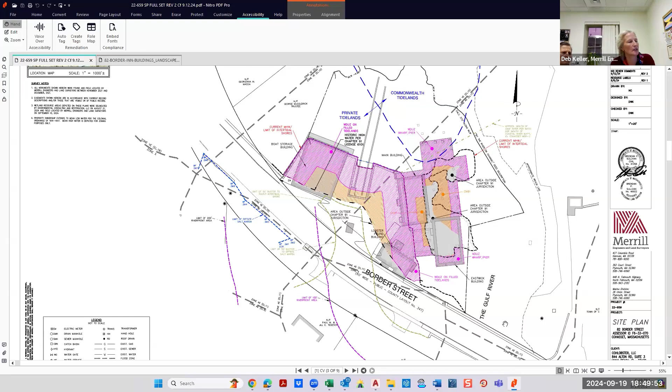Moving along, as mentioned, we have a detailed construction plan included, which includes an erosion control and demo plan. This is the boathouse that is to be razed and removed. This is the gatehouse, which we're doing some minor restoration to. And these two structures here on piles, along with the associated deck surrounding them, will be elevated approximately 3 feet, going to a first floor elevation of elevation 12, as well as the deck.

We can go into detail on construction staging if needed, but we're showing here the minimum work needed, which is the stabilized construction entrance and erosion control around the upland area and pavement area. The write-up from the contractor goes into further detail on additional erosion control needed while raising the buildings over the water.

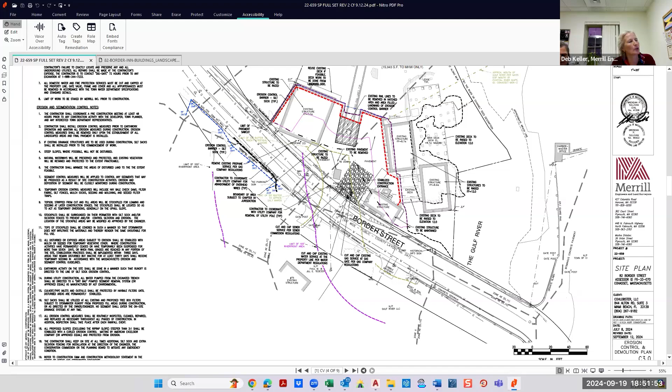Okay, I'm going to move and zoom in a bit more here. Site plan: I think the biggest change is the boathouse, which currently goes all the way up to the abutment and follows this line. We're razing that structure and proposing a smaller structure farther away from the water resource or intertidal mean high water resources.

We're staying within the existing impervious surface areas of the site. The gatehouse here will have minor repairs on the outside, but no major structural changes. The main inn and the Eastwick Inn and the decks will all be raised.

Access to the site will still continue to be off Border Street. We have a horseshoe driveway, surface parking here, and additional surface parking which will be at-grade garage with the unit above in the new building. With that being said, the goal here was to make sure that we enhance the site.

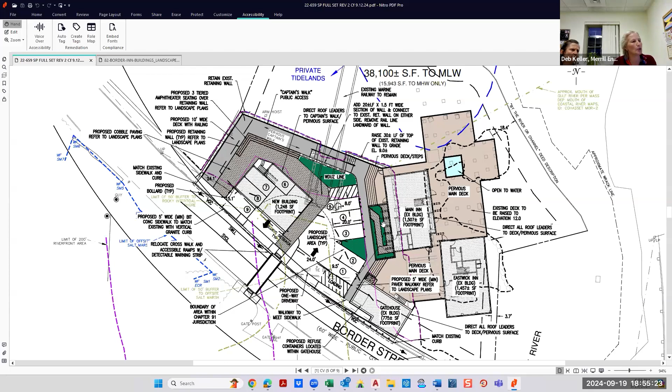To show you a bit of what we're doing, as mentioned, we're proposing a retaining wall here so that we can fill this portion of the marine rail and raise these two, tying in surface grades into the two buildings and deck that are being elevated.

With that, we still have to meet Border Street, so we're only raising the site itself up to approximately 9.3, as 9.4 is the high point on the site, where I believe it's on average about elevation 7. So it's about 2.5 feet of fill. This would be the deepest area right here where the marine rail is, and obviously we'd be tapering back to Border Street and then tying into the existing structures.

The new structure will be at grade at 9.3. The gatehouse remains the same with a slab of 9.2, as in existing conditions.

And then, quickly just showing you utilities: all the buildings will have new utilities subsurface, and the goal of the project would be to put the electrical underground at the frontage as well, so that all services would be underground.

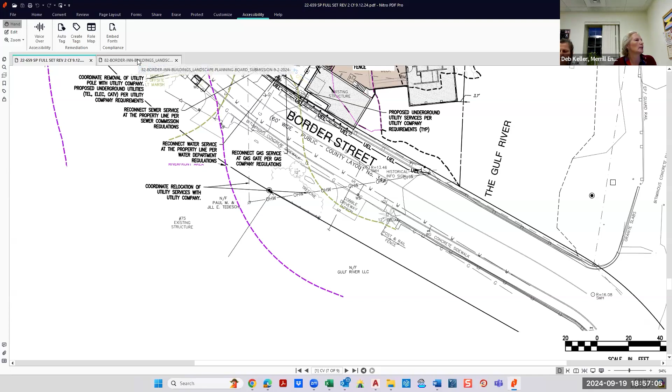And I can hop briefly to the landscaping plans that were submitted with our resubmission. I'll zoom in just a little bit closer, maybe not that close.

So what's nice about the deck, I didn't mention this too, is that they're looking to have sort of an open view area on it so that we can enjoy the water below and watch that flow, as I'm sure it can be quite amazing.

And here you can see the Captain's Walk again. This darker gray here is some seating area put in to enhance the Captain's Walk along the harbor side, and then back into the Captain's 5-foot walk as you continue back down to Border Street again.

As you see here, you can see the planters that the landscape architect was intending for the deck, and those would be movable structures, so they can reconfigure those areas as needed. Accessible ramp up to the main entrance, with landscaping surrounding the ramp and 2 larger landscape areas with pervious cobble pavers around the new building.

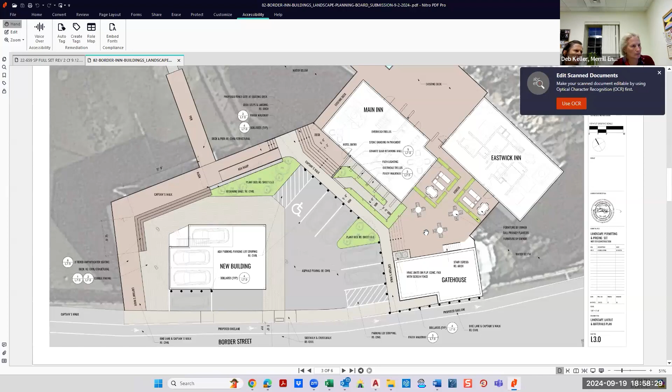Let me scroll so you can see this. Kara has grasses and ground cover, a swamp white oak, some Rosa virginiana, and beach plum in the main large area for landscaping. Similar again in this larger area, and consistent with the grasses and a Rosa virginiana in the walkway ramp landscaping areas.

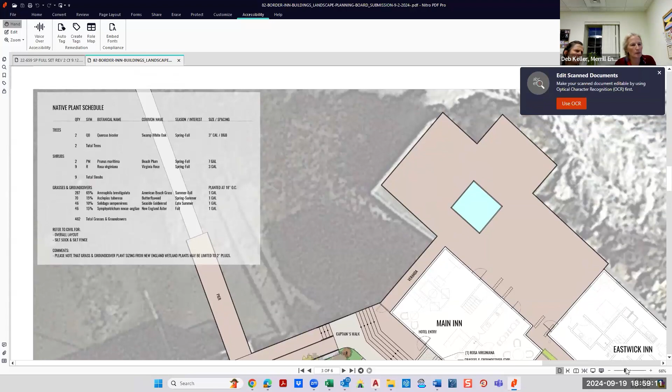I believe if I can zoom up here, you can see what is being included. Let me make that a little bigger. So again, swamp white oak, beach plum, Virginia rose, and several grasses and ground covers.

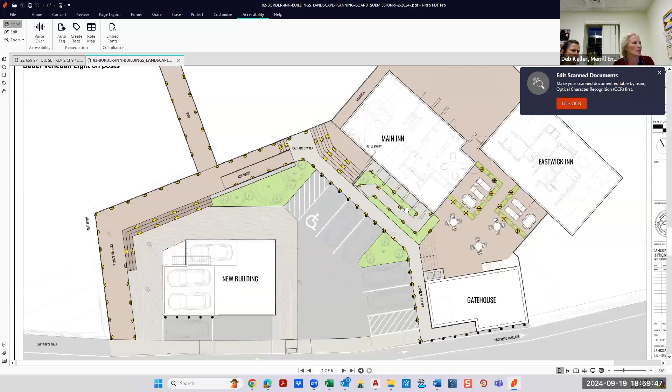And I believe that's probably the one you want to see the most. She has identified lighting, so everything is down lighting, pedestrian lighting, no tall street lights, just to try to provide lighting for accessibility, pedestrian accessibility through the site. And those were the details. I think I've covered pretty much everything, and I'm happy to answer any questions.

Can you think of anything else? No? Thank you. Okay, put us to pretty picture. This one.

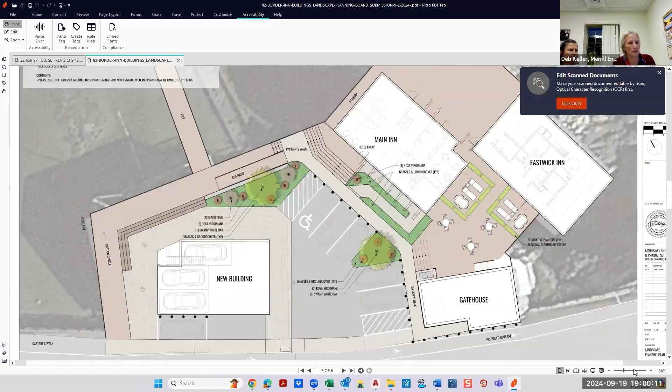So before we move on to Commissioner Charlotte, I know that you had prepared some comments, and there was some back and forth and some responses from the applicant. Before I move on to petitioners or commissioners' thoughts and questions, is there anything outstanding that you want to bring to our attention first? Yeah, so just a couple of things from my round of comments.

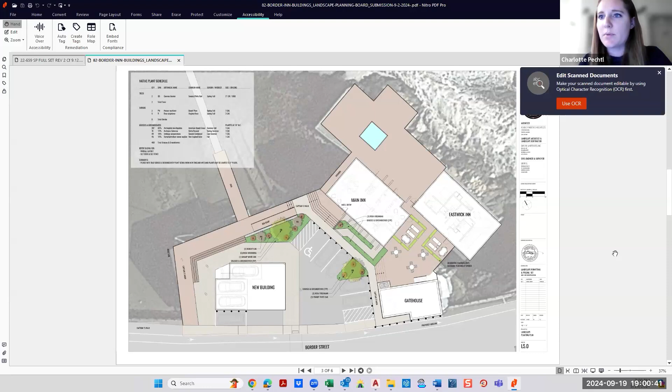So as of yesterday, I believe, we did receive comments from the Division of Marine Fisheries. Just a quick summary: they're not recommending a time of year restriction because the work is utilizing the existing piles that are below the deck. That was a clarification I had as well, addressed in the comments, that for the existing piers and pilings, they're not replacing any of those, so there will not be impacts to land underwater for that. That's why DMF did not recommend a time of year restriction.

They did recommend that construction activity near the intertidal zone be limited to work in low tide and dry conditions for the removal of that railway. And then they had some other recommendations on staging and obviously doing the work all from the upland and not from the water, given the sensitivity with the Gulf River and fish passage and habitat.

The wetlands that were flagged, the salt marsh across the street, we're just waiting on the wetland delineation report from ECR on that. The harbor master did mention to me that she did want to review this. Depending on her comments, I'm not sure if they would be more suitable either for conservation or for one of the other board reviews. So if they are related to conservation, I will obtain those.

And then there were some updates to the plans regarding erosion and sedimentation control. Some of that might be contingent upon the pending peer review revisions in regards to stormwater management and compliance with the stormwater standards. So we would probably want to see those site plan edits on the plans. I'm sure there'll be some discussion and conditions about that once we have more of a final version.

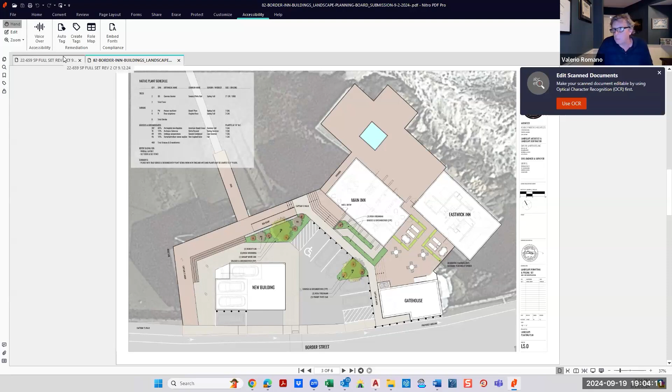Great, thank you, Charlotte. And so for the commissioners, this is clearly an early meeting where we're obviously going to hear more about this project and get some additional information. So with that in mind, Commissioner Bell, what questions or comments do we have for the applicant?

I guess the first thing I'm wondering about is the elevations here. You're in the AE zone where the flood elevation is 11 feet, I believe. Yes. And the highest elevation in the horseshoe or courtyard that you're doing here for parking is at 9.44. Why wouldn't you anticipate that the AE zone would be elevated maybe in the near future? And would that cause problems for you?

I'm not sure that that's within our jurisdiction. I'm sure Mr. Brodsky will correct me if it's not. But just as a matter of curiosity, I would think it would make sense to try to at least get to that AE elevation early rather than have to retrofit this thing at some later date.

So I can answer hopefully a little bit, and if I'm wrong, Adam can correct me. The structures will all be elevated, specifically the two larger buildings, the Eastwick Inn and the main inn, as well as the deck, will be elevated to elevation 12 above the AE zone. The new building has a slab of 9.3, but that's parking below, and we'll have flood vents so that it is flood compliant. The residential portion of this is on the second floor, so it'll be well above the floodplain elevation here.

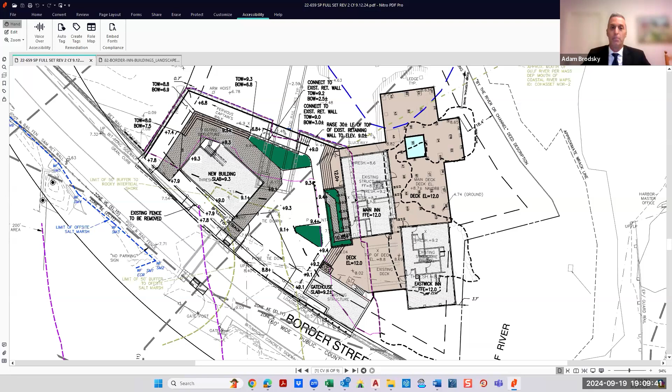Well, I know the question I'd like to ask would be outside of our jurisdiction, so I will not ask it. We'll leave that to zoning and planning. So beyond that, I don't really have any other questions or comments. Thank you, Commissioner Bell. Commissioner Berrigan?

I was wondering if maybe the commission would be interested in getting a peer review to check compliance with WPA, because there are several resource areas on this particular site. Would that be something we might consider, to make sure everything's okay?

I'm asking my colleagues — yes, that is my consideration, Commissioner Berrigan. From my perspective, yes. I always encourage that, if it's the will of the rest of the commission, particularly when we're talking about compliance with resource areas, and I'm all for it. I don't know what the rest of the commission thinks.

Maybe you want to move on to any other questions or comments you have, and then we can bring that up with the rest of the commission and talk to the applicant too, as to whether now is the appropriate time, because this certainly isn't the only hearing we're going to have with them. We're going to get further stormwater comments back via the planning board's request for peer review, my understanding. Are there other questions or comments? Then we'll get to that one.

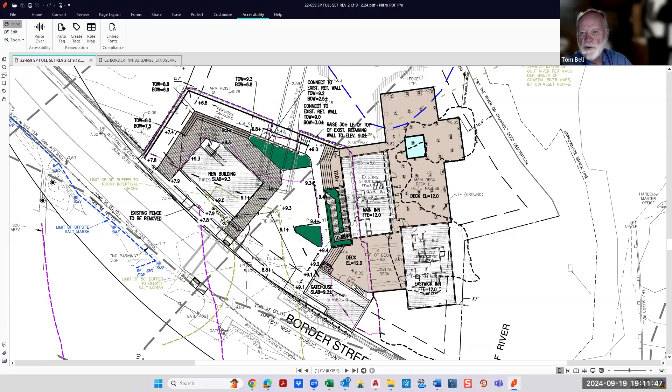I think for the applicant, it would serve all of us better to present a far less complex plan. There's a lot of stuff that we don't care about — it's outside our jurisdiction, doesn't matter to us — but it would be nice to see an expansion of what you've done here, identifying those areas with the most restrictive aspects, so we can talk about each individually. This is a good start, I think. A lot of the material has been removed, and perhaps this might be sufficient.

But I'm just always looking at these plans. The first one looked like a plate of spaghetti to anybody not used to looking at these construction diagrams. I think it does not serve an applicant well to have lots of stuff on their plans that is not in our jurisdiction. So it's just a reminder to applicants — make it simple, make life easier for us.

And Chair Romano, at the appropriate time, I'd like to speak to that issue, the peer review, please. Sure — maybe if it's all right, Mr. Brodsky, we'll just run through the rest of the commissioners, and then maybe you could come back and talk to us a little bit about it.

To Mr. Bell's comment, for me — Tom has got a lot of experience, and if anyone is talking about spaghetti, then it certainly looks like a four-course carbonara meal to me. So to the extent that we wanted a simplified version, maybe just a short summary or cheat sheet for the commissioners, of which specific regulations are implicated given the various resource areas that exist in this project.

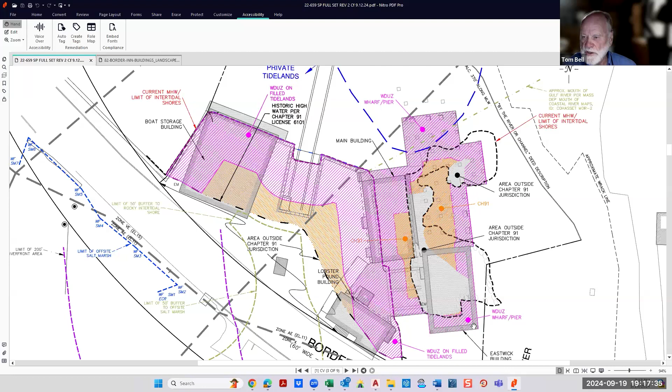And it looks like the load here is going to increase. I could be wrong, but you're adding on your building form. And so if the load is increased, then you need to have a load analysis, and then look at those pilings and make sure that they do meet at least the state requirements.

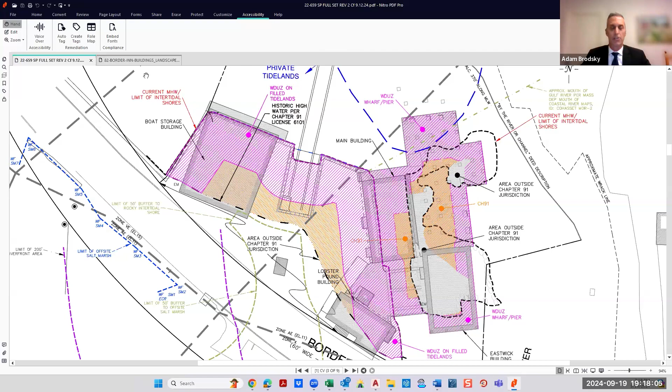Sorry, Ms. Keller, you're muted. This is Adam Brodsky. I don't know whether Deb or Caroline wish to speak to that issue. That's a building code issue. That's not a conservation commission issue.

We will need to, as part of our building permit application, make sure that we provide evidence sufficient to demonstrate that we meet all the requirements of the state building code with respect to load. That will also be reviewed by DEP in connection with the Chapter 91 process, because there are engineering standards for improvements to structures under Chapter 91.

So it's a valid concern. I'm not sure it's a concern of this commission. Or it will be if they need to be replaced. Yes, that's correct. Just a quick add, I just got a note saying that yes, they have been reviewed by a structural engineer. So that review process has happened during the design process that we've had.

I would second that concern, and if for some reason something were to fail, then we would be seriously harming the habitat, and that is under our jurisdiction. And then if they need to be replaced, that's also something that falls within our purview.

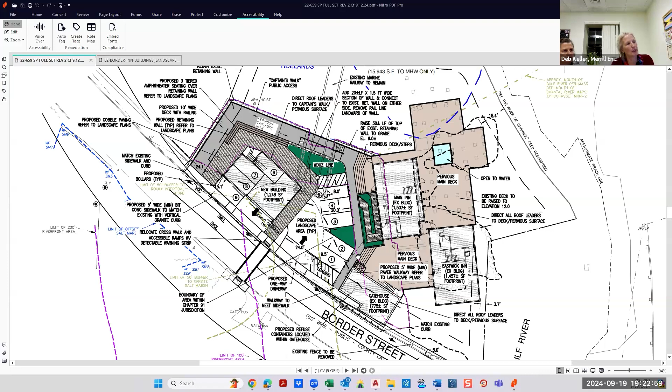Can I interrupt and make an obvious comment—that's land, that's soil beneath on that side. But the east side, the Eastwick side, is this not a land area? Right, this is all pretty much over water. The upland area is this black dashed line, a kind of funky shape, and it primarily encompasses ledge, which is not included as pervious. You have water flowing in a channel underneath the main inn and to the east of the deck and Eastwick building.

So this deck—when we talked about increasing pervious surface or decreasing impervious surface, you were really just talking about the captain's walk over the land. Yes, that's correct. Okay, that helps me understand. Thank you so much.

So Charlotte, was one of the comments from a state agency that there'll be no work from the waterway? Let me pull up the DMF letter. I think they wanted the removal of the marine railway limited to low tide, with all work conducted in the dry, meaning from the land and not in any wet conditions. They also wanted staging of construction material and equipment in the intertidal zone to be avoided, so obviously no storing anything in the resource areas past the limit of work.

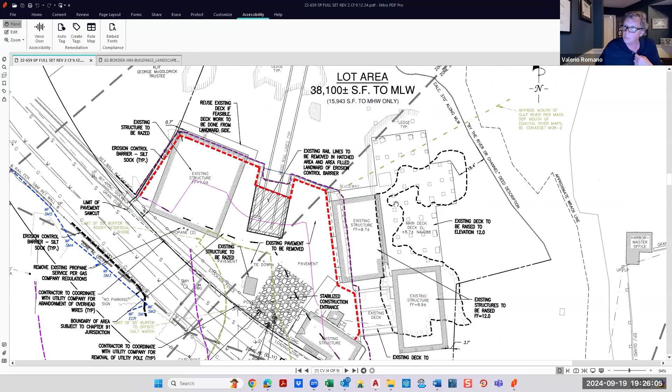Chair Romano, we can provide you with more information. The general contractor is in the audience. The intention here is to do this project from the land side, but there are going to be instances where I believe workmen are going to have to access the outer edges of this. This is what we're proposing to do is very similar to what was done and what is being done around the corner at 46 Border Street.

And this plan was developed, it took some time, and Ms. Pechtl could probably speak to that. It took some time to come up with an acceptable plan that was acceptable to the commission, acceptable to the harbor master, as well as all the other regulators. And we're duplicating that very same approach here because one, it's been approved by everyone, two, it has apparently worked without incident. So that's what we're trying to duplicate at this site.

Great, yeah, and I wasn't questioning that. I just don't want the commission to be in the position of approving or considering construction methodology which conflicts with some other approval that was given, that's the only reason I bring it up. It makes sense to me that there may be a dock that somebody would have to stand on when they're clearing something, but it just seemed conflicting from reading both and then from hearing what Charlotte was saying. So that's the reason I brought it up.

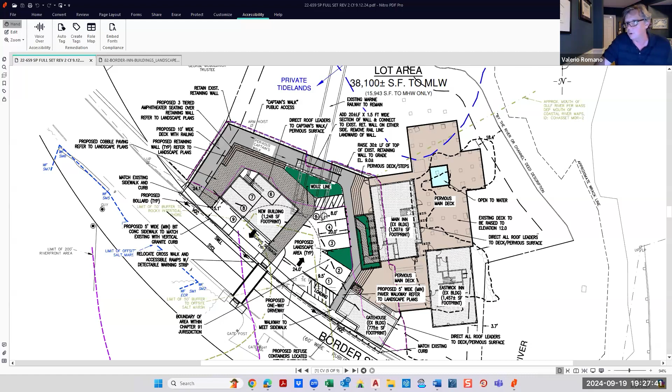And I'm sure if the construction manager, the contractor wants to speak to it, or we can bring it up later on, that future hearing too, if it's necessary. I just thought I would mention it because I saw possible conflict there. But yeah, it seems to have worked well down the street, so I have no reason to think it won't work well here. Those are the extent of my questions now. Does anyone else on the commission have anything else for this phase of the hearing?

Since you brought up this issue, I would disagree that this is completely analogous to what's happening at the old Atlantica site. You have essentially a tidal falls here, a reversing falls here, and so any kind of a silt barrier there would be very hard to maintain. So work that might have to take place on the main deck and perhaps the Eastwick building and maybe even the main building are going to have fairly serious conditions of flow underneath them while it's happening.

So that the analogy can only be extended so far. Some of the things you may be referring to are the nets to catch things from falling in the water, and obviously that seems to have worked out quite well over at the other site, but it remains to be seen how this is going to work out here. Like I say, that analogy can only go so far because it's pretty still water over there. Tide comes in, tide goes out, but it's fairly still water. This is far from being still water when the tide's moving, which is most of the time.

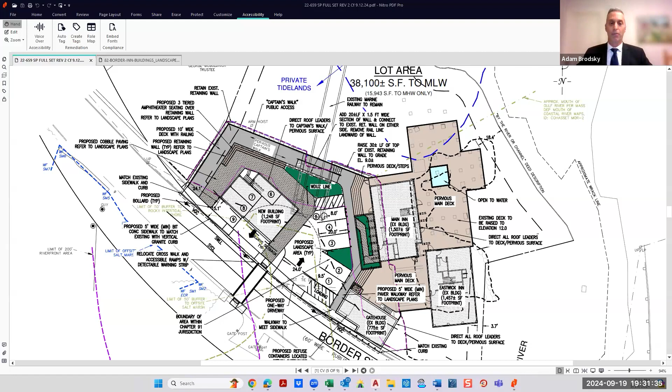I can't speak intelligently about location of booms in the water and the effect of the tidal river on the booms, but again, we're happy to have a conversation. This is not going to be without challenges, and I'm imagining that this is going to have to be adjusted in the field during the course of construction with changing conditions, which I think is what happened at Atlantica. I think we had plan A, and then we realized it wasn't going to work. There were subsequent iterations of that. I don't know what version we ended up with, whether it was B, C, D, or E. It was something about a living thing. I don't have firsthand knowledge of that, but we're prepared to work with the commission and the community to provide assurances, because we don't want any debris in the water.

Thank you, Adam. Just clarifying briefly, it was definitely an evolving process over at Atlantica.

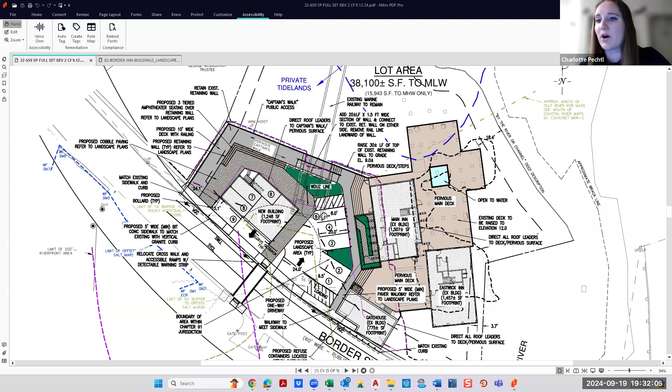The original safety netting design was not able to be physically secured to some of the outward facing structures, so we had to modify the netting design. The floating docks within the silt boom were also a secondary measure to prevent debris—if anything got through, it would stay within the silt containment boom, but it would also be on the floating docks, which could easily be pulled over with rope to remove any debris. So at least we did have to modify that during construction.

That may or may not be something we need to do here, but it's definitely something to discuss further, maybe at another hearing with more information. It might be best to visit the site, which I'm happy to do with the contractor, and look at it initially, but I'm sure it'll probably change throughout construction.

I don't know if there's anything else we need to hear. Given that there's a lot going on here, typically we wait for input from the public until towards the end, which would be a hearing or two from now. But if anybody here wanted to give their input, and anything for us to think about as we come back and refine our plans for next time, now might be an appropriate time.

Charlotte, do you see anybody raising their hand or wishing to speak? Not at the moment. Great, no questions yet.

So before we continue it, assuming there's no objection from the applicant to continue it, Charlotte, is there anything else we should consider?

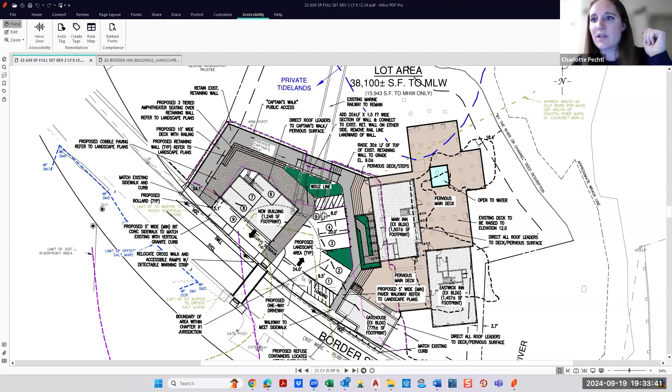Going back to Kathy's question, we'll get updated site plans and responses regarding DMF's comments and the peer review comments from Weston and Sampson regarding stormwater standards compliance. That's definitely some stuff we are waiting on. And then there's the wetlands reports and updating the erosion controls, and potentially putting any silt containment boom location on the plans, or leaving it as something to be decided in the field.

Mr. Brodsky, I know you wanted to speak about further peer review beyond the stormwater requested by planning. Thank you. I'd rather be accused of providing too much information to the commission than not providing enough, but we will provide you with a simplified drawing. It's the commission's prerogative to determine whether you want additional peer review.

I'll offer a different perspective, which is from a wetlands point of view, there's a lot going on, but it's a pretty simple project. We're not doing any work in land underwater. We're not doing any work in the intertidal zone other than to remove portions of the marine railway. It's a floodplain case, and it's a previously developed site intended to improve flood resiliency. So I don't think there's any question regarding the delineation of the wetland resource areas.

We'll have the dredge out in the pond there. We'll be dredging with a 6-inch hose up to our separation area. That fluid initially goes through scalping shaker machines that we run. This machine allows us to separate any large particles.

You can stop there for a minute. This allows us to separate any large particles from the slurry stream. We don't want this material going through any of our separation machines down the line. This is a good area also if we happen to have any small wildlife or anything of that nature that didn't stay out of the way of the dredge. This is an area where we can see that happen, and we're able to capture anything small that made it through the pump so it can be returned back to its environment without harm.

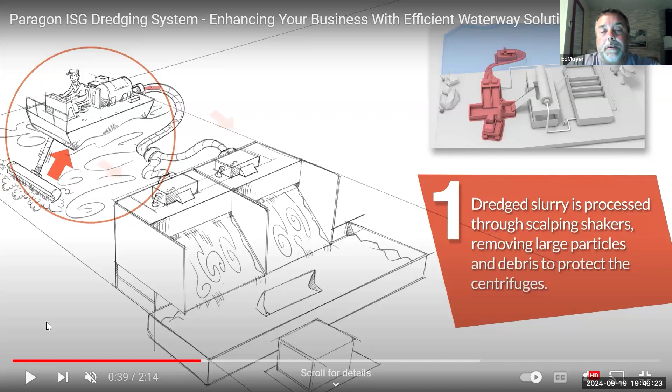So we have guys here all the time monitoring this to make sure we don't have any mishaps like that. And then from this point, if you want to keep going, the fluid runs down into a tank, and then gets pumped over to a clarifier tank on the right hand side.

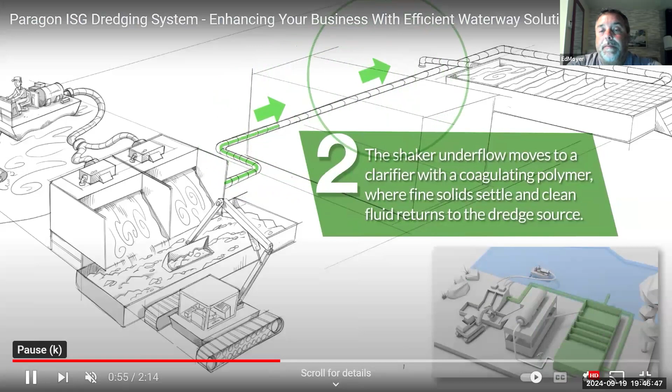In this tank, the debris is mixed with a food grade, eco-friendly polymer. It's a non-anionic polymer that will not harm fish in any way. It grabs the small particles caused in the dredge operation, binds them together, makes them bigger, allows them to settle to the bottom of the tank, and overflow clean fluid off the top.

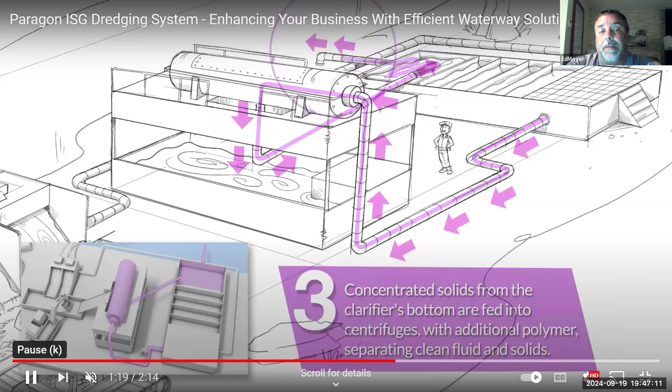We return this fluid back to the pond. The sediment that falls to the bottom of the clarifier tank is actually drawn into a high-speed centrifuge that you see here. It spins at a high rate of speed, and the G-force separates the solids and the fluid.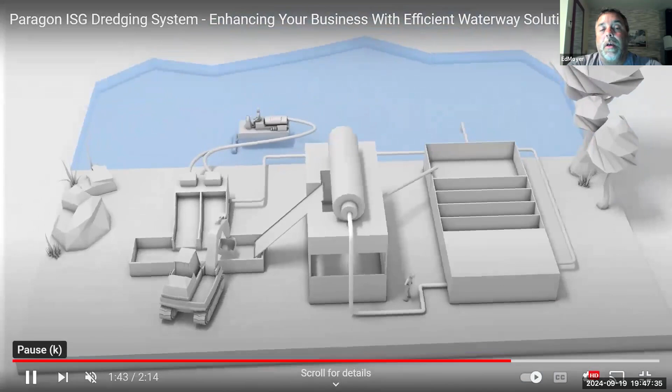Solids go down to a collection slide that'll go into a bin where we will use an excavator for moving that to a repurposed site, stacking it, and the clean fluid comes out the other end of the centrifuge, and that is returned back to the pond.

We return that back at the far end of the pond from any overflow areas. That way it gives plenty of time for any settling that is needed or disturbance that would potentially go downstream. And then again, we have the safety barrier of the turbidity curtains as well.

That would stop any turbidity from going downstream. So that's kind of our process. We use hydraulic dredging. Normally, wildlife and fish aren't disturbed by it. They'll usually stay far away. Like I said, if we do happen to pull anything in, we can catch them at the shale shaker option to return them, which we've done many times.

It's a good safety item to have on site. So yeah, that's kind of the process, and then mechanical separation, and the solids are able to be hauled away immediately or repurposed.

Any questions at all on the process that I maybe didn't cover, or any concerns you may have? I'm just going to put the plan up here too, just to refresh everyone's memory related to the location of the pond with the pumped material to be addressed in an upland area that's already open at the club property.

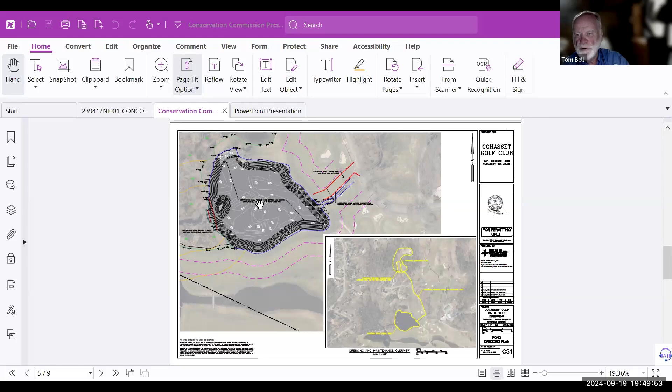So there's still water that's going to be left in your tailings then that you need. A little bit, yes. And can you estimate how much water that would be if you know the volume of material you're going to move or remove? Can you give us a rough estimate of how much water is going to be? Well, you said you're going to carry it off the site. Is that right? You're not going to stockpile it at the disposal site?

And so some of that water then is going to escape from your solids pile, your waste pile. I'm just curious how much do you think it's going to be bleeding out of that? You actually don't get much leachate from the material. I mean, it looks like moist dirt sitting there. I mean, it sounds like a lot, but it's really not. So they'll usually have 20% water, which normal dirt has a lot of moisture in it as well.

So Commissioner Bell, just to continue on that, Mr. Mayer.

Well, last time this was before us, there were a couple options for dredging, but now the team, the golf club team with you, this is sort of the proposal as to what the option is going to be now, right? It's not that the commission's still tasked with choosing one mechanical methodology or method of dredging this, but this is what's being proposed now specifically. Is that fair to say?

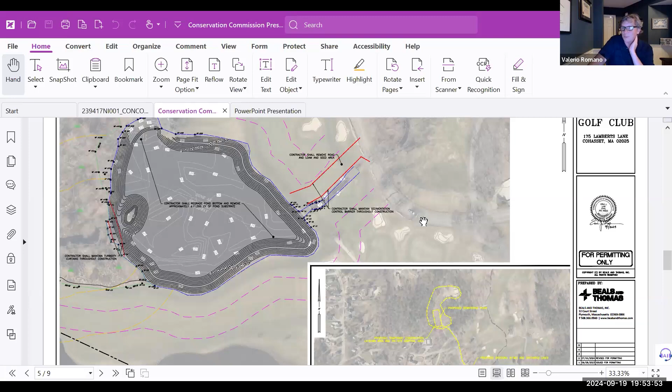We haven't submitted anything since we last spoke in July, just because we wanted to delve in a bit more to this specific proposal so you could understand from Paragon more detail about their process. I really like the simplified view, the cartoon-like description of how it works. It really helped me.

But to Commissioner Bell's point, the July submission talked about 11,000 cubic yards of sediment being removed. Am I to understand that 80% of that is water? No, I'm sorry - to Commissioner Bell's point, it's 80% of the water that's returned to the pond. Less than 20% stays in the soil at the dump area. I was thinking, how could 80% of that water stay on that site? It just didn't make sense.

It flows two ways, so the height of the pond won't change, shouldn't change. What they suck out gets pumped back. So there's 20% which, to Ed's point, is just soil. I think if you did a water test on any soil, it would be about 20%.

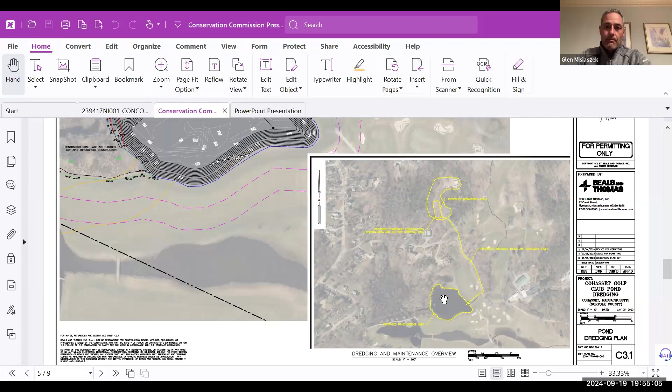So it seems to me one of the merits of this hydraulic system is it's all done through pipelines. You're not going to run trucks back and forth to move the sediment up the hill, and then if you move it off site, back down the hill to cart it off. So that seems like a relatively low impact compared to the machinery necessary to move those solids by truck.

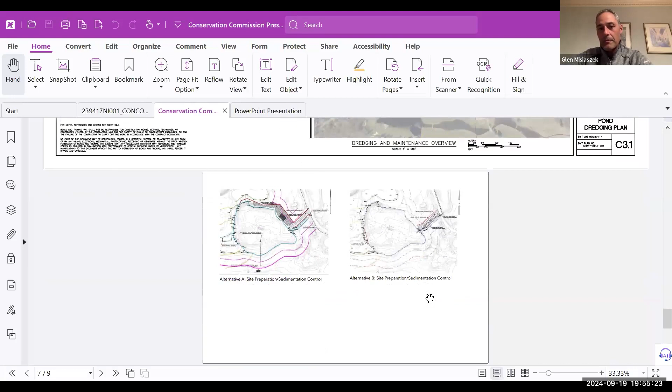Correct. And we're handling what the commission requested last time about how we were going to drain the pond down, and downstream flooding - this has no impact to that. Multiple turbidity curtains will be installed.

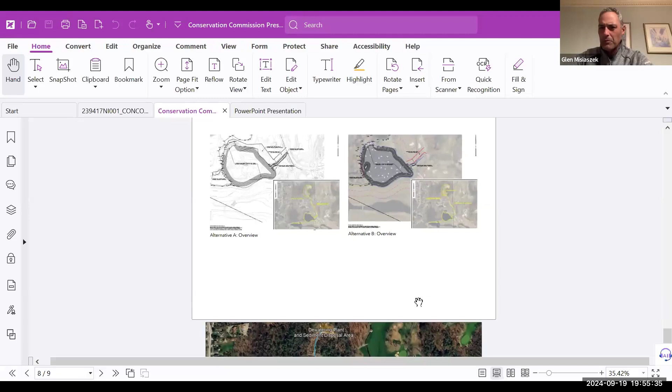And Ed, what did Dan say it gets down to - 2 microns is the filter? Yes, we'll get down to less than 2 micron with a high-speed centrifuge. So pretty small.

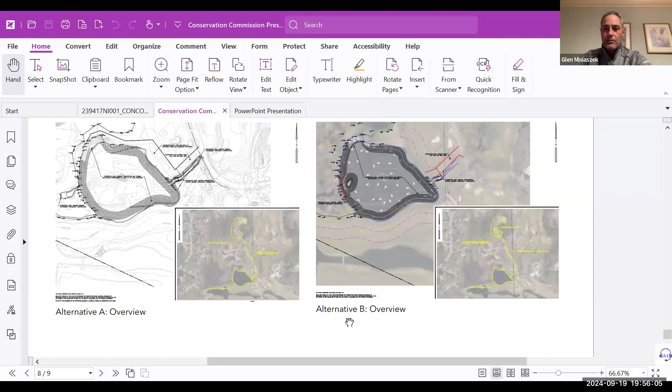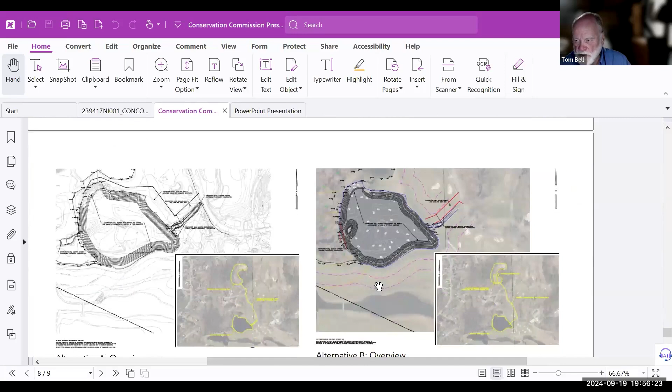But prior to going through the centrifuge, you're going to flocculate that clay with your polymer, is that correct? Yeah, so just before the clarifier tank up on the hill is where the polymer gets injected. And then that polymer stays in the solids - you don't have any polymer carryover back to the pond. So that takes those 2 micron and sub-2 micron clay particles and aggregates them into something the centrifuge can then... Yes, sir, it raises the mass and allows the G-force to separate it. Yes, sir.

Is there no carryover concentration of the polymer going back in the water - it all gets taken out? Yes, as long as it's injected properly, you have very, very little carryover if any at all. As long as it's injected properly, it stays trapped in the soil rather than in the water returning.

Is there a test for that when it gets returned, to check if any of the polymer's in it? You can do an NTU test to make sure, but yeah, very little residual. And if there is any residual, it's food grade polymer - 100% fish friendly. It does not cause any disturbance to the water, wildlife, or habitat. It's very commonly used in hydraulic dredging operations and wastewater treatment.

Does it eventually break down? Assuming it does - it is a polymer, it will break down over time. Do you know the half-life of that polymer? I don't off the top of my head, I'll have to get back to you. Talking about details - days, weeks, months, or years? Months at the most. Definitely not years.

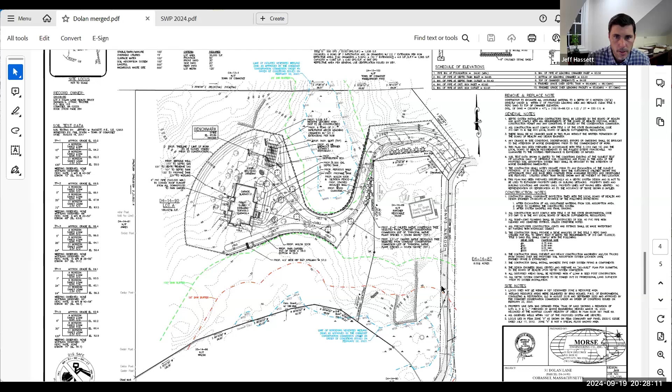So IVW, 25-foot buffer in green. The driveway is going to pitch to the left-hand side where we have a swale shown, detailed on the second sheet, and that feeds into a planted rain garden. And then on the right-hand side, there is a 4-foot tall boulder wall.

So the layout of the house itself doesn't change at all. There will be all the erosion barriers in place, that bold dash line is the mulch sock. We have notes on the plan calling for all of the limits of work to be staked by a professional land surveyor. And we provided stormwater calculations updated to show that there still will be no increase in runoff to the 3 design points that we have. So with that, I will pass it back to you and I can answer questions. Thank you.

Commissioner Bell? Jeff, on the previous. Oh, sorry, go ahead, Chris.

On the previous plan, I don't remember if this was recommended, but I think we asked for alternatives to going through the resource on plan south. There was significantly more trees that would need to be removed for this, and that was one of the reasons why you didn't want to do that. There was a lot of ledge, and additionally you're going right through the buffer, which is only the 25, but in my opinion that's kind of like the 50 if it were a regular bordering vegetated wetlands. So is there a mitigation plan for the buffer zone that you're driving through here?

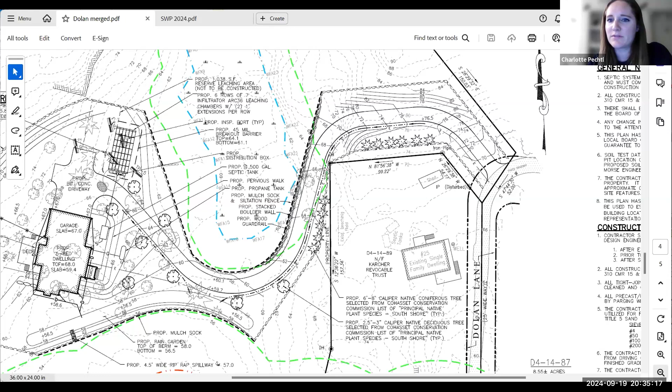Jeff, do you know the date of when Brad flagged this? I know it's been a while, but I don't know what time of year he went out. Usually it says it on the plans. Oh, February 2023. Okay.

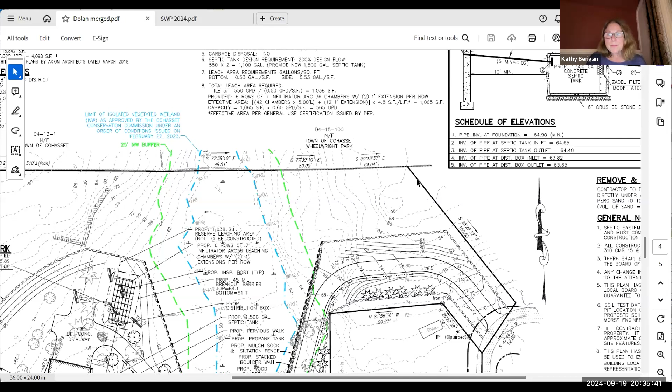Sorry to interrupt, my computer is acting up. It keeps turning off my video. If I get logged off, I'll log right back in. I'm not on Wi-Fi, so I don't know why it's doing this, but just to give you a heads up.

Commissioner McNell: Are the two lines of coniferous trees just outside the driveway, towards the end of the driveway, intended to replace the ones in the buffer zone, or were they intended to replace trees elsewhere? They are intended more as privacy screening to the neighbor.

I see. Okay. So this is the only way in, essentially. That's correct. And even though we asked for an alternative to the original plan, which would have an easement through the more southerly part of number 25, this seemed like this alternative, plus the one that you initially proposed that we approved, which crossed about the middle of 25's property, seemed like the only alternatives.

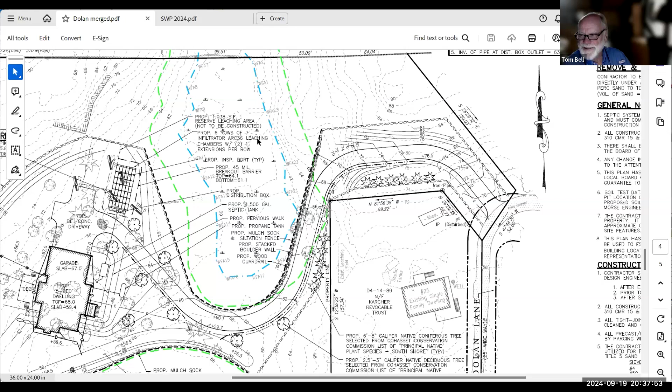Yeah, so without getting into a situation of a limited project, this seemed to be really the only workable, or one of the only workable, solutions. Jeff may or may not have cut out. No, I'm here. Yeah. Oh, you are? I agree with your analysis of that.

So is the other proposal for the driveway now off the table, with working with the neighbors no longer going to happen, and this is the only proposal in front of us? Yeah, they've tried. It's in my client's best interest to have that straight shot of a driveway. He's really tried, and they haven't been successful with getting that easement.

That being said, I've asked Charlotte, spoken to her about this coming in with this as a new NOI and a new stormwater permit instead of amending the other one. And what I'd like to do, if it's okay with you, is have a condition that one of the permits must be closed out prior to any work and prior to a pre-construction meeting. Yeah, I think that makes sense.

We could issue some sort of order of conditions that really just says the project is no longer eligible or appropriate, something like that. Yeah, definitely. I have, whenever we're ready, a recommended condition for that, because this one would only be jurisdictional under our bylaw, whereas the original project going through the BVW buffer was jurisdictional under the act and the bylaw.

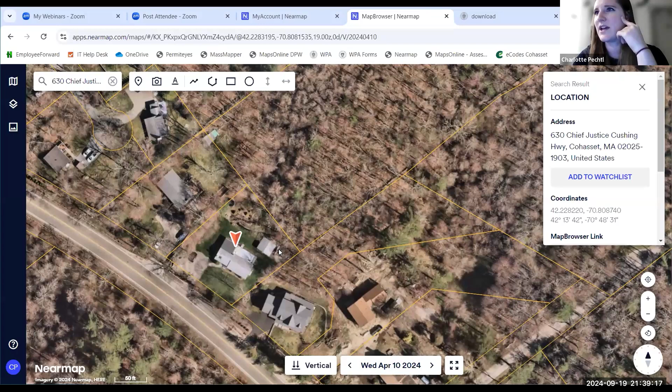So, sorry, this is where it gets a little tough. I can try to get to a photo where there's less vegetation, but 630 is here and 640 is here. 634 is in the middle, and this party and this party are both saying that they altered the stream. This party is saying that this person hired people to come over to her property and clear out the stream, and then this party is saying that this person had somebody go in and do it.

So it's kind of hard to see, but this is where the stream is, and the bank up here has boulders. You can't really see it with the Nearmap imagery, but they're stacked behind this, looks like a shed or a garage. You could see that some of the rocks had been moved from their location in the stream to this bank area potentially. It's even hard to tell if those were the rocks that were part of the stream, but it definitely did look like rocks and boulders were removed in this tight area that kind of bottlenecked before it comes back out and goes through a culvert here.

And then the stream kind of goes back here and keeps going. So I haven't seen this side of where everything goes. At some point it crosses over to this person's property.

So, it's kind of hard to tell. I've really only seen the site conditions here and not from here to here. That's another thing I wasn't able to look at, despite me saying we need to come out and look at it.

Which direction is downstream? This way. I see, so it flows through the woods here. It looks like I can kind of see it here. It flows through the woods and then into a culvert here.

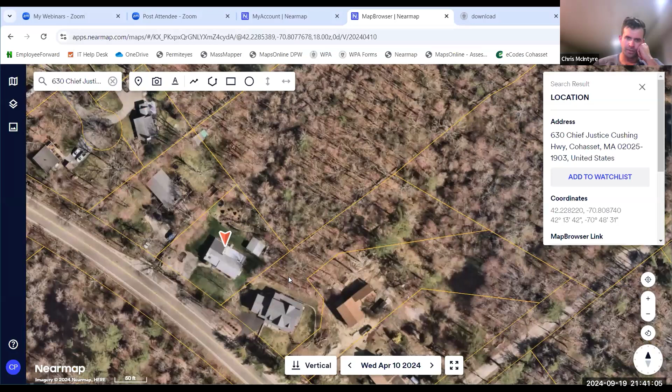Charlotte, if you scroll down, plan north to that house, that property, then scroll up to center. Keep going a little bit, zoom in on where your cursor is. Center it, bring it up. Directly down north, just bring it directly straight. So that house right there.

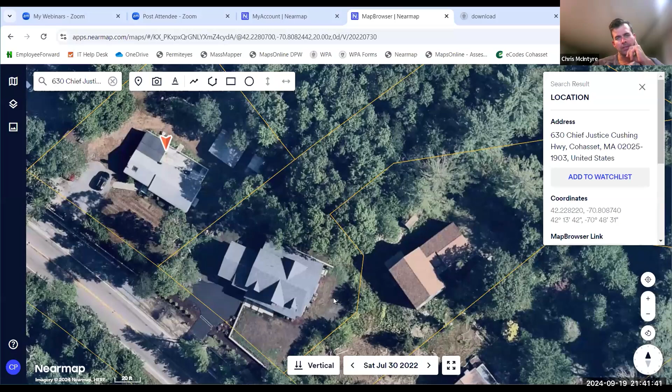So now go back in time a month or two, to 2022. This house right here, the retaining wall you saw in 2023 is not present. Then go forward, and probably this is when the retaining wall is now present. It could have something to do with it too.

I don't think it's just flooding from the stream. I think they're just going off the photos we got from the neighbors, showing water in the yard. We just don't have enough evidence. We need someone to weigh in on the conditions there, like a geologist or hydrologist, someone who can explain what's causing the flooding.

Yeah, as you guys know I sound like a broken record. I've been explaining the weather a lot to people this past year because it's gotten so wet, and people have been calling and blaming it on construction, on their neighbors, etc. Maybe to a certain point that was the case, but overall the water table was so high and people's properties were flooding, which is definitely scary.

So I think some people were trying to think someone did something that caused this, rather than recognizing this is now the pattern of wetter springs and winters, with water rising much higher than they've seen in the past. You can't go by the past anymore, saying 'I've lived here 40 years' — you can't really reference that as much with the weather patterns changing. You all know this, obviously.

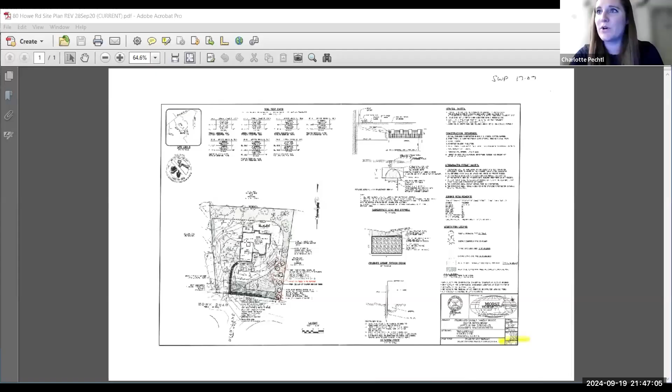Maybe Jeff has a better copy, but this was a construction of a single family home. It was just a stormwater permit. This is on pretty much a hill on Howe Road, so it sits pretty high up, and the driveway goes down to meet the existing grade of the road.

So this is the approved plan. I know it's a little blurry to read. It was home, garage, and had two subsurface infiltration chambers that would connect all the roof drain connections to these systems underground.

And then there would also be a proposed rain garden stormwater depression at elevation 93 bottom, 94 top. And then there was a proposed pervious driveway. I don't think the original material was called out on the plan, so it is gravel pavers.

It is not porous asphalt, and we are in the process of getting the updated long-term maintenance plan signed and recorded, so that will be done administratively before a COC is issued. So just to give you a reference, this was the approved plan.

Oh, and then there's also a crushed stone trench that was on the right side of the driveway here, where the rain garden would kind of, this and the rain garden would collect the runoff coming down the hill in the driveway, and then connect - this trench was going to connect to a trench drain, which is this thick black line right here. And then proposed landscaping on this side.

There was a separate landscaping plan from 2017, which I can pull up for reference, but I'll just note that the 2017 landscaping plan obviously does not include, it was never updated to include the current house plan, which was approved September 28th, 2020. That's unfortunately something I've seen happen with a lot of these properties in this area, where the plans were revised multiple times, but the landscaping plan didn't really follow up on that.

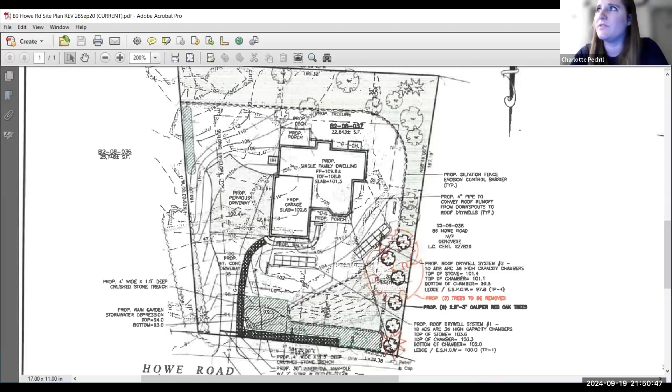So I know we're at the end here. It did take a while for the project to finally come around. I'm sure the homeowners are pleased with this. There were just a few deviations that I can go over on the as-built, and then I'll turn it over to the commission and anybody else for questions.

So this is the as-built. A couple things I'll note, and I can pull both plans up for comparison. The ledge outcrops versus the ledge outcrops surveyed on the plan are different. From what we've seen, it seems the landscaping was obviously a relation to that, so some of the ledge may have gotten buried with the loam and seed rather than being removed. The ledge outcrops you see on the plans here don't show the same outlines as the plan from 2020.

We had to re-add the existing trees that remained from this tree line. These trees in the back of the property in this corner were proposed to remain, located on the site. This tree was remaining. And then these are the red oaks - 1, 2, 3, 4, 5, and one down here, 6 red oaks that were added. You see the roof drain connections and landscaping here.

In terms of the deviations, there was a pervious patio installed in the backyard. It is pervious - you can see the separation and what looks like fine gravel between the pavers. There's a small retaining wall built here and a pervious walkway with stairs coming out from the porch, which Jeff mentioned helps with stabilizing and controlling this area with runoff a little bit more.

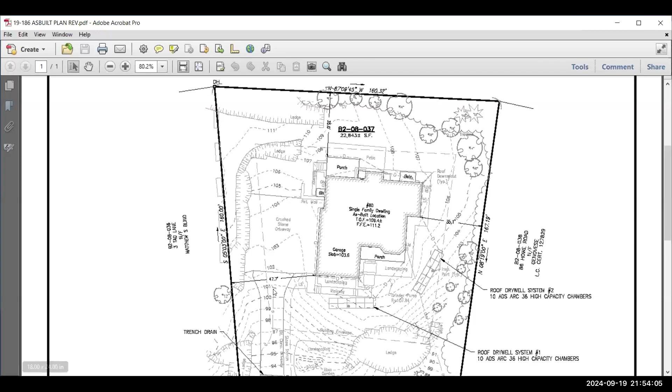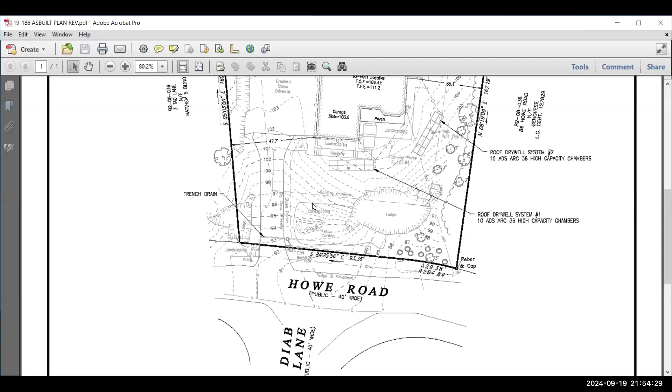I saw there's a pervious driveway up top near the garage. The impervious portion of the driveway drains to a drain going across, capturing all the runoff coming down, tying into a small leaching pit with an overflow to a stone trench. The rain garden was built properly. The dry wells were built properly, and Morse Engineering inspected those before they were covered up. All the downspouts are going into the ground and connecting to them. So this project took a while to get to this point, but it's fully stabilized, and I'm satisfied.

Great, Commissioner Bell? I don't have any questions. Commissioner Berrigan? No questions, thank you. Commissioner Magnell? I've got no additional questions.

I have to say that it does look very, very nice now as we come up the street, being an almost neighbor. Oh, great.

Commissioner McIntyre? No, I'm good. Yeah, same, particularly after Steve's input there. Sincerely, I'm good too.

Charlotte, anything else we should be thinking about?

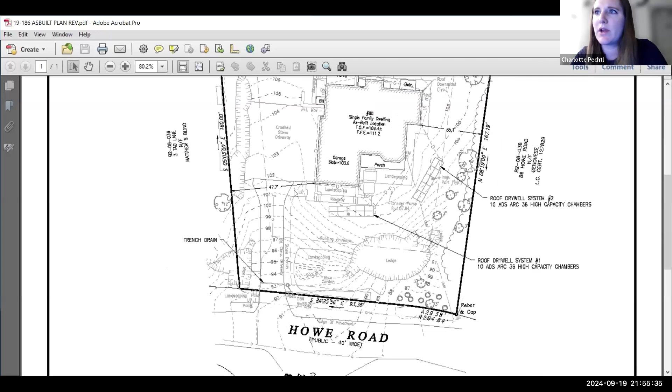I will work with Brett and Jen to record the long-term operation and maintenance plan. It was just updated today. We removed any porous pavement maintenance and replaced it with crushed stone maintenance and the rain garden maintenance, modifying the O&M plan from 2017 or previous years. That will be recorded with the registry prior to the issuance of a COC, but I can do that administratively if you're okay with it, since it needs to be recorded before the COC is issued.

So the updated maintenance plan you'll get and confirm it reflects the final as-built, and then that gets recorded. Jeff had just updated it and I signed it, and then the owners will sign and record it with the registry. Once they give me recording proof, I can issue the COC, if you're okay with that administrative process. I've done it before, it's not a huge burden at all—once I get it, I just print out the COC, takes two seconds.

Does anybody want to make a motion regarding the COC?

I'll do that. Go ahead. Sorry, go please, Chris. I do move for the COC. Oh, yeah, go ahead, sorry Steve, you sounded like Chris for a second, please. Excuse me? Oh, were you making a motion? I think I interrupted you, I didn't mean to. I am.

So you move to make the motion to issue a certificate of compliance and completion for the project at 80 Howe, for stormwater permit 1707. It's been a while. I'll second that.

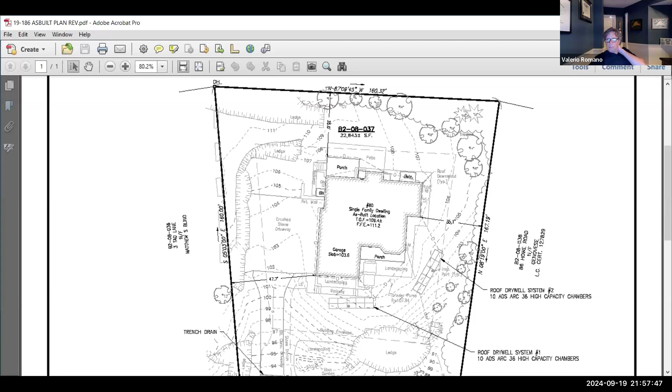That's great. Please work with Charlotte on making sure we have the final plan to be registered. Yeah, absolutely. Thank you, everyone. Thanks, guys. Good night, congrats, welcome.

Just a reminder that the second one for 49 Border was continued—they're going to finish some plantings and come back to us. So that ends the various hearings that were noticed.